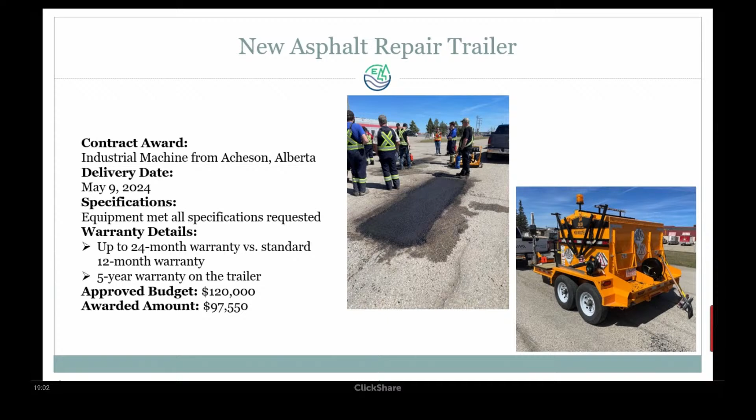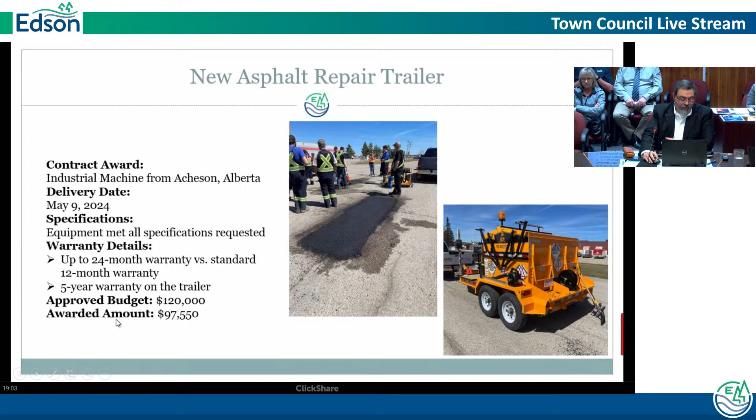All the equipment met the specification requested, and we upgraded the warranty to 24 months instead of 12 months for the equipment itself, and the trailer has a 5-year warranty. Approved budget for this item is $120,000, and the awarded amount is $97,550.

Fleet projects out for tender: we have unit V141 replacement, a 2013 Ford F-250 crew cab 3/4 ton 4x4 service truck. The tender was posted on April 29th, 2024, and closed May 16th. Up to the point I submitted this presentation, I did not get information regarding who the lowest bidder was or who we awarded to.

For unit E114 replacement, it's an ice resurfacer. The tender was also posted April 29th, 2024, with closing date May 16th.

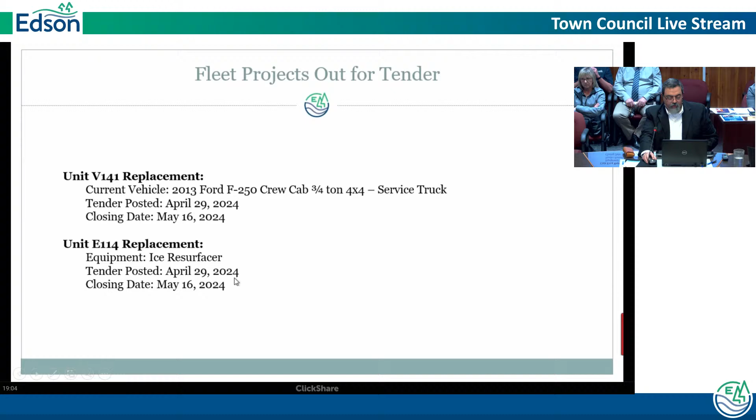For fleet and utilities upcoming 2024 projects, we have the fluoride plan, a regulatory contract signed with Advisian, our consultant, and work has started. Water treatment degas is also regulatory; it's in design and will start once the fluoride work is complete.

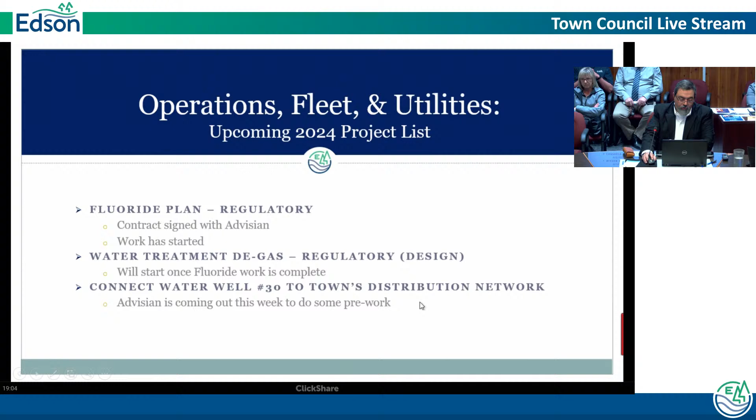Connecting water well number 30 to the town's distribution network. Advisian is coming out this week to do some pre-work.

For operations, transportation, and parks upcoming 2024 projects: Vision Park, and directional signage for Wilmore Park. These are coming projects.

Item MT Trackless 7 for parks: it's an articulating all-season tractor. This was a 2023 item carried over to 2024. The tender was issued May 4th, 2023, and closed May 25th, 2023. The 2023 budget carry forward is $210,000.

It was awarded to Joe Johnson Equipment. The award amount is $183,167.84. Delivery date is February 16, 2024, so it has been delivered.

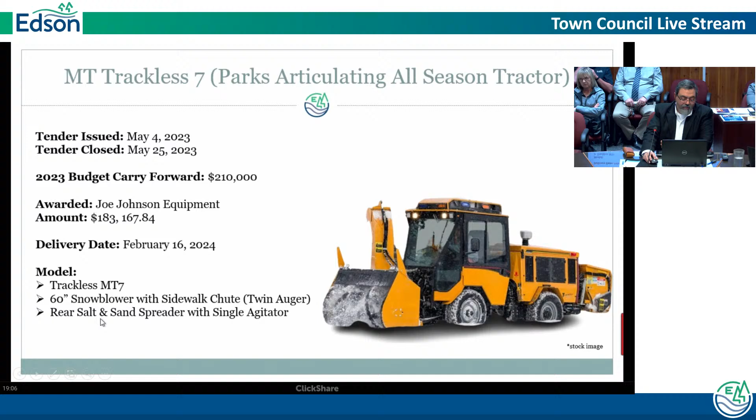The model is the Trackless MT7, with a 60-inch snow blower with sidewalk chute twin auger, and a rear salt and sand spreader with single agitator.

The new item: new plow blade for the airport. The budget was $35,000. Purchase price is $25,939.75. Acquisition date was March 1st, 2024, and the model is CAT 966G.

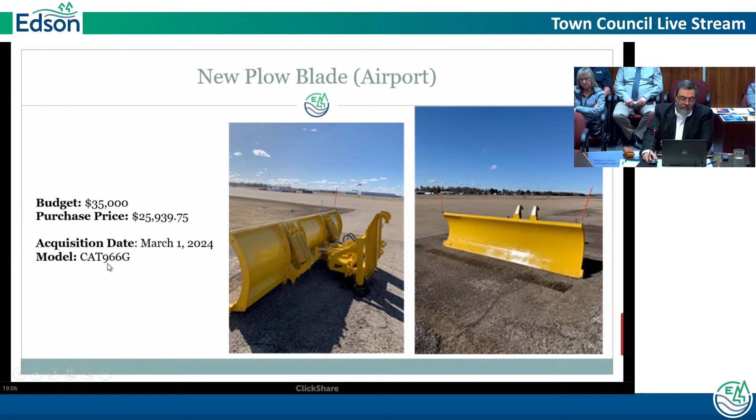Any questions before I move to the new section? Councillor Pisichny, go ahead.

I think I'll ask Mr. Briscoe or Mr. O'Sullivan. I can answer that. Come on up, Mr. Briscoe.

Through the mayor to Councillor Pisichny: yeah, we're also surprised too. To be honest with you, to be fair, we hand delivered the tender packages to our 3 local dealers and we put it out on APC. When we reviewed it, the Calgary dealership, I believe, has got the last 4 out of our vehicles that we put out. So I'm not sure what needs to change or what can change.

We do put it out, like I said, hand deliver our tender packages to our local fleet dealerships, and we do put it on APC, and it comes back delivered to our door. Typically, they'll drive it out to us for that price, freight on board to Edson.

Thank you, Mr. Briscoe. Any other questions? That's your turn, thank you so much. All right, you can continue on with your presentation. Sure.

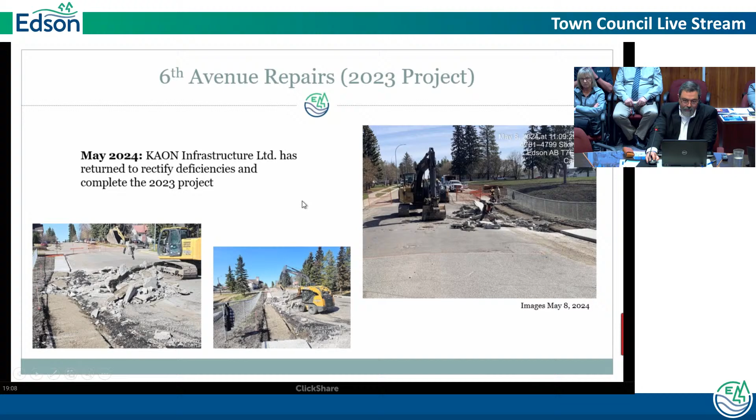Power line burial on 46th Street between 6th and 9th Avenue. We received the quote, and right now Fortis is in the design process. We received the quote on Friday, signed it, and sent it back to Fortis. The quote came for roughly $282,000. It's within our budget.

However, that doesn't include Shaw, TELUS, or any other utilities. This is just for Fortis, so we are expecting some extra cost to come later on. Right now they are working on the design, and they will be having an easement agreement with the school and the two apartment buildings down the road to make sure they can have their utilities on their land.

The construction phase is planned to take place during the summer months, July or August. I made this clear to them that we cannot start construction until the school is over, to ensure the safety of our residents.

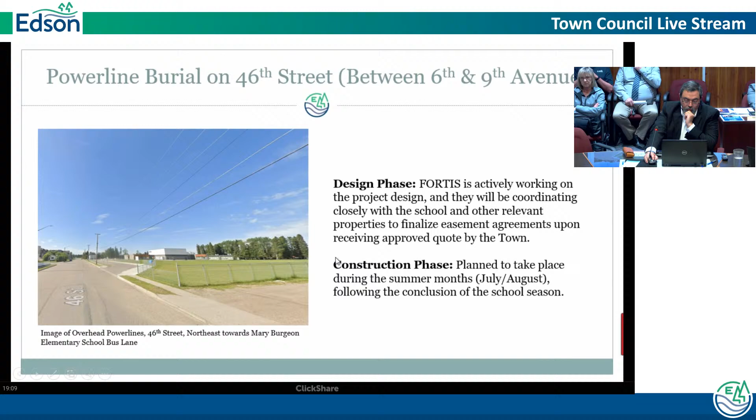I'll move to the next project, which is the construction of Township Road 532 between 54th Street and 63rd Street. We completed the tree clearing work in the 4th quarter of 2023, done by a local contractor, McLeod Valley Sand and Gravel. Survey work was also completed in quarter 4 of 2023 by McElhanney Ltd. Geotechnical investigation was completed in quarter 1 of 2024 by MR Engineering. We are currently preparing the tender for design work in 2024.

These two pictures show the auger for the geotechnical investigation. I need to be really transparent and convey what's happening, because I was on site. There is a significant section on the west side of the road where, when I asked for geotechnical investigation, I asked for a depth up to 3.5 meters. But when they were on site, they kept augering up to 6 meters, trying to find the bottom, and the whole depth was peat moss or muskeg.

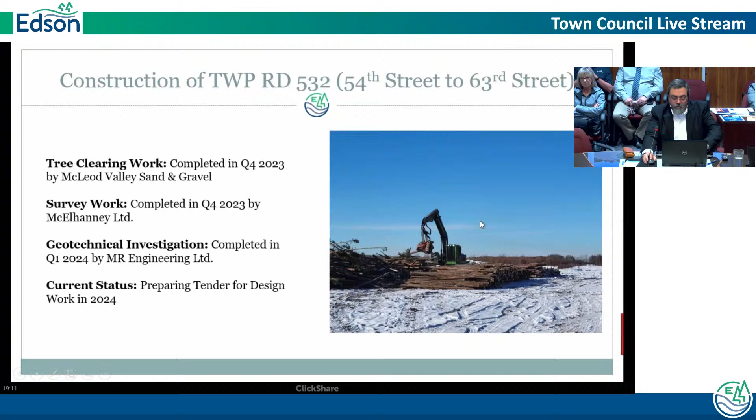It's all organic material, and just to clarify, this area has a high water table, and this organic material is compressible—extremely compressible. So I'm expecting the design engineer will take every precaution, mostly using a geogrid, maybe one or two layers. However, there is still a potential for settlement, so we might start working on this road and have to come back six months later, after the freeze and thaw cycle, to see if there's any settlement so we can backfill and repair.

This picture shows the auger reaching almost 6 meters, and yet they could not find a solid layer of soil.

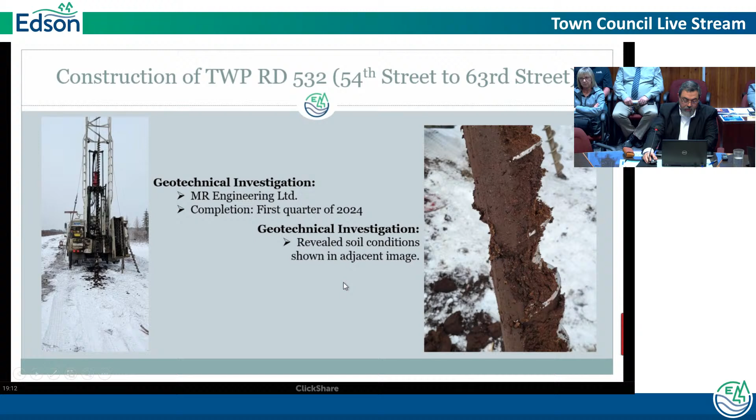18th Avenue Rehabilitation. The design and engineering consultant is WSP, a local consultant. The construction contractor is Parkway Enterprises Ltd.

Construction notices were circulated to the residents. We sent multiple notices to advise them on construction dates, detours, road closures, and temporary water connections. We're trying to keep residents up to date for every single action we take—we hand deliver notices, and publish them on our website and social media as well.

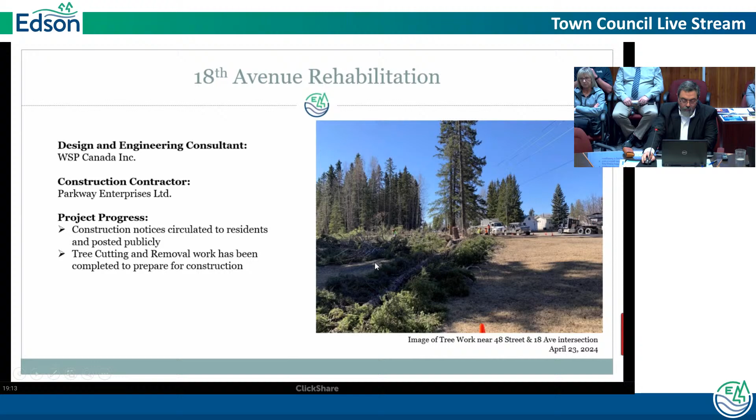We completed the tree cutting and removal work in preparation for excavation for the water line, and today was the first actual day of construction, so if somebody drove by they would see detour signs and the road closed. This picture shows the tree cutting from almost four weeks ago, and today is May 21st, so as I mentioned, construction has already started.

They have laid down a staging area at the east side of 48th, at the intersection of 48th and 18th, where they have all their equipment, material, and a trailer for a security guard to stay overnight.

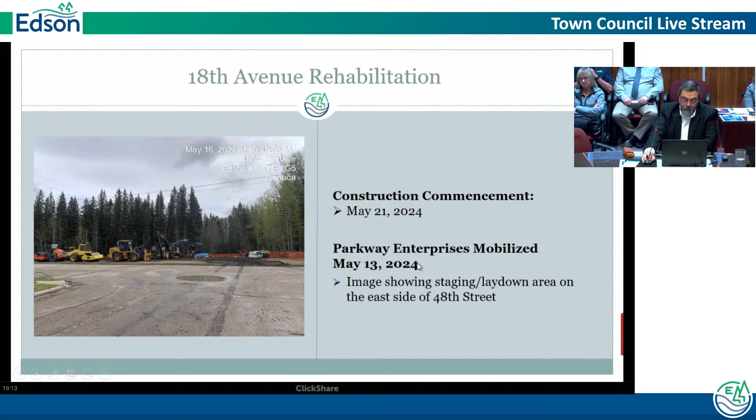These two pictures show the black pipe laying on the ground—this is the temporary water connection. We are connecting the houses to temporary water from the outside hose tap, and we will be turning their main valve off to ensure they have water during construction, because when we are constructing we are disconnecting the water main for replacement or for replacing services.

We took every precaution we can take. We have check valves on both sides to ensure water cannot return back in case there is negative pressure in the network, so no water can go back and cause contamination. I contacted the health and safety officer to ensure all our process is correct. We disinfected the line, and they should be connecting them on this line today or tomorrow.

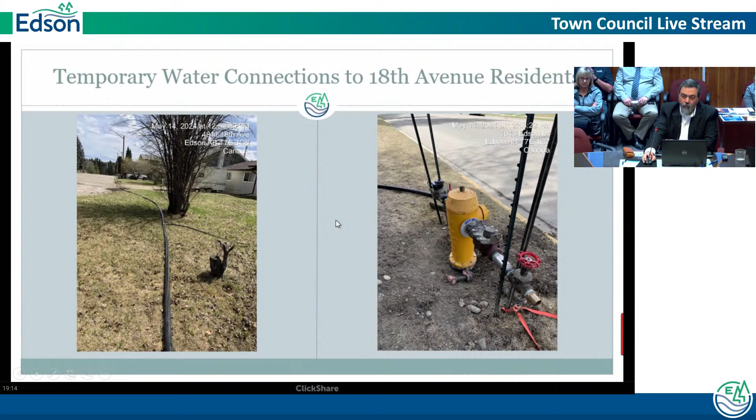I'll move on to 54th Street and 10th Avenue sanitary upgrade. Design and engineering consultant is McElhanney Ltd. Construction contractor is GS Holding Company, also known as GS Construction.

Construction timeline: construction commenced April 29, 2024 at the intersection of 54th Street and First Avenue. Anticipated work commencement on 10th Avenue is June 20th, weather pending, since we had to shut down for a few days due to rain. Anticipated project duration is approximately 90 working days, weather permitting.

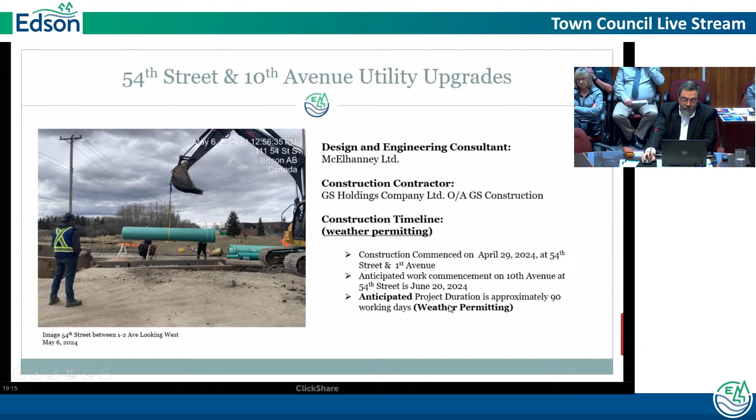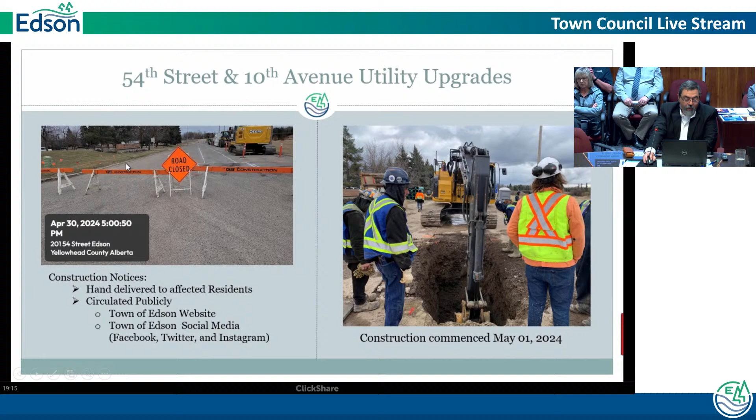Another couple of pictures showing the excavator cutting the ground for the trench for the sanitary line. And this is the road closure on April 30th when they arrived.

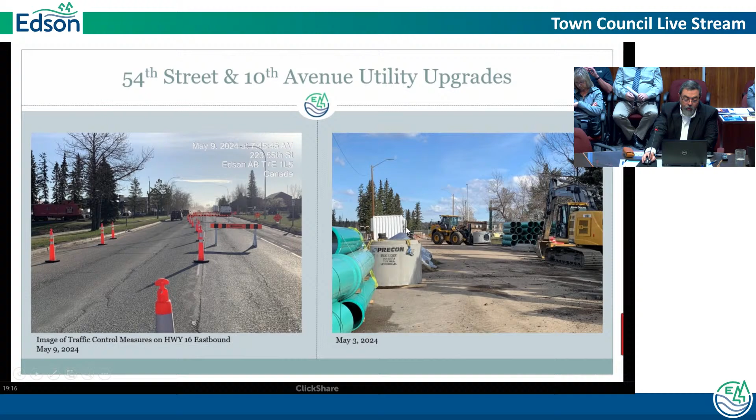As I mentioned, they had to shut down for a few days, so we maintained a wide one lane during the weekend. So far I haven't heard any complaints, and we hope by Friday the whole intersection will be open.

Upcoming projects for 2024: Wase Creek construction - shortly we will hear a presentation from ISL Engineering regarding their study, findings, and different options. Library parking lot and stormwater improvement design hasn't started yet. Anticipated 2023 flood repair in 2024 is ongoing with internal forces.

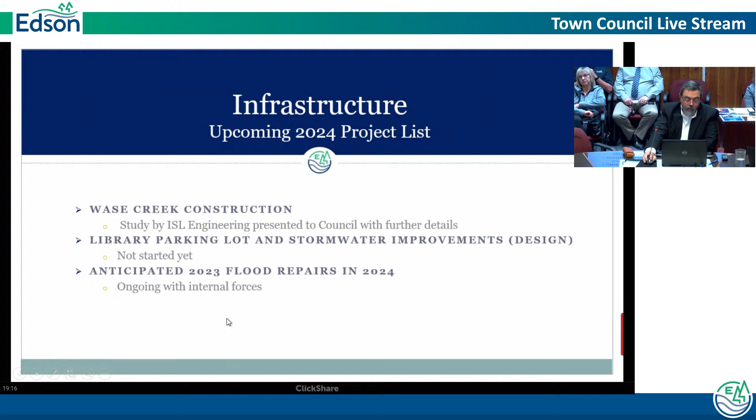Go ahead, Councillor Chouinard. Thank you for your presentation. I think somewhat over on 18th Avenue where we cut the trees down, I was asked why did we cut them. We're digging a water line in there - is that what was going on?

Through Mayor to Council Chouinard, yes, you're correct. There is a water line on the boulevard, that's where the PRV is, and there is a power line above the water line as well. So we had to clear the area to make sure there is enough room for the excavator to work without hitting the power lines. You're welcome.

Go ahead, Councillor Taylor. Through the mayor, thank you again for your presentation, and first off, thank you for getting the tenders out so early so we could start construction early May and not like September. This is great to see this construction happening and hopefully completed soon.

Just a question regarding 18th Avenue with setting up the temporary water lines to the houses. Are we expecting them to have any water pressure issues within the homes or anything like that?

Thank you for the question and thank you for the compliment. Through Mayor to Council Taylor, no, there should not be any water pressure issues unless there is a fire and there is a demand for water. That's the only case we can draw water and it can impact the pressure. But so far there shouldn't, because it's a 2-inch line providing enough pressure. You're welcome.

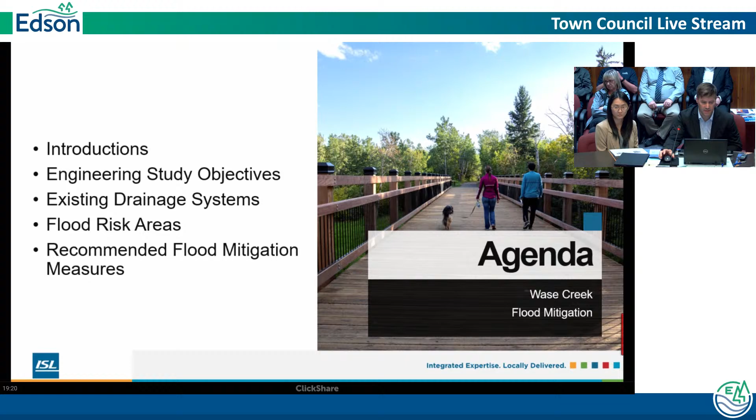Okay, thank you, Ermia, and good evening, Mayor and Council. So as mentioned, we're looking into Wase Creek specifically - the drainage, flooding, mitigation, and management of the flows through the Wase Creek area. Through this presentation, we'll look at the engineering study objectives, existing drainage systems, flood risk areas, and recommended flood mitigation measures.

For this project, we worked directly with Ermia McHale and Ryan O'Sullivan with the Town of Edson. I'm Jordan Hoffert, project manager for this project. We also have Sophia Liu here, who did a lot of the modeling work for the stormwater model. And we had a senior advisor, Russell Barth, who has many years of experience with stormwater management and water resource engineering. He was unable to be here today, but we do have a good understanding ourselves.

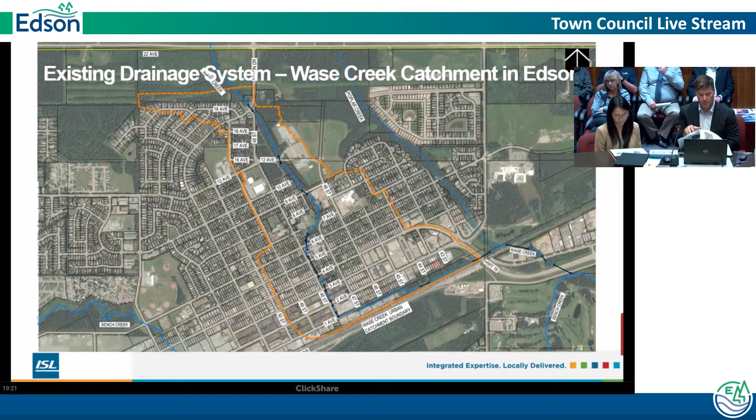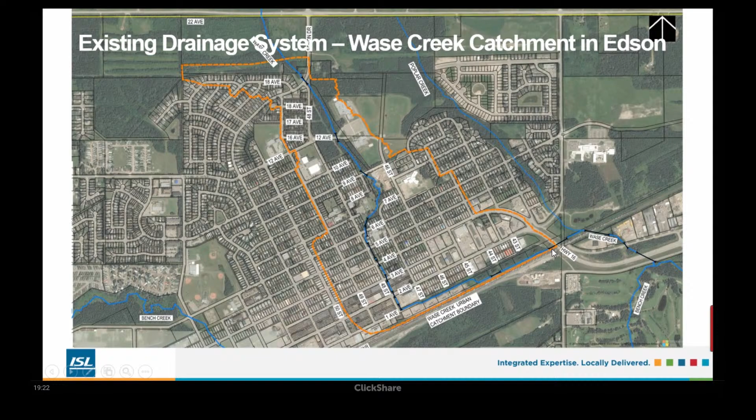Okay, so the existing drainage system - just a bit of background, and I'm sure you're very familiar with Wase Creek, but it is one of 3 creeks that runs right through the town of Edson. What we're seeing here is the urban catchment highlighted in orange. So basically anything within this boundary contributes to the flows of Wase Creek. Of note is the outlet, at the southeast corner by Highway 16 and the CN rail that's basically parallel to the avenues there. There are lots that border the CN rail where this creek is currently located, which is of significant note for this project.

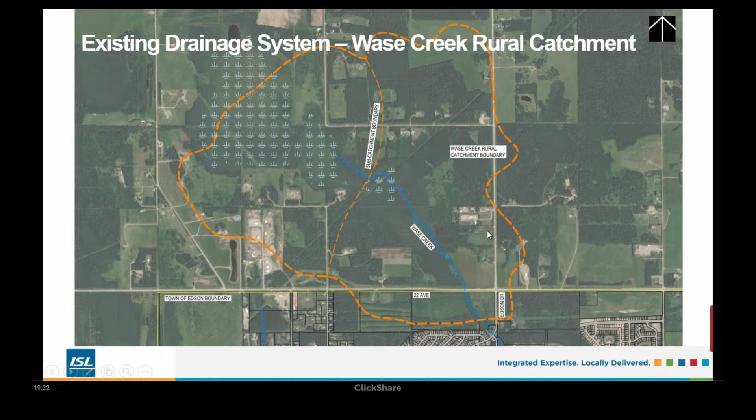To the north of town, there is an additional catchment that does contribute to the Wase Creek drainage. This area is fairly large, but has a slower runoff contributing to the Wase Creek basin. But these flows do flow through town as well.

What we want to do with the study is understand the stormwater flow for the creek and all the contributing areas, both urban and rural, as well as any pipe flow that discharges into the creek. From that, we want to use a computer simulation for modeling those flows, specifically so we can quantify and identify any areas that might be at risk. And then we can also use that tool to propose different flood mitigation measures that may be needed.

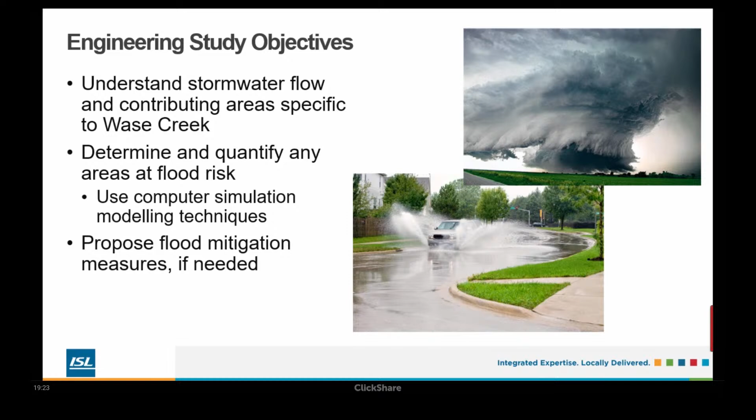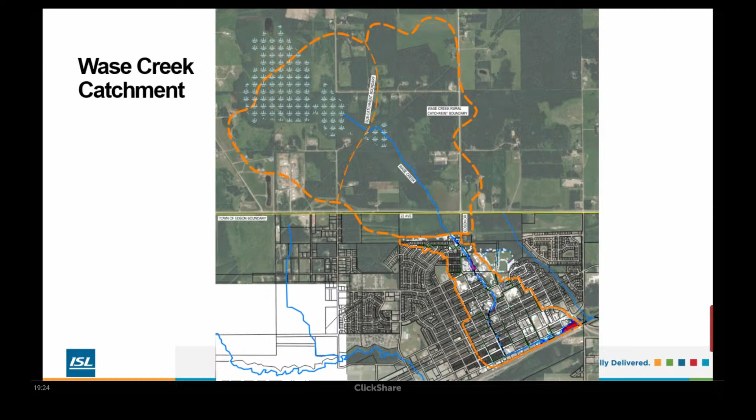As mentioned, there are the 2 catchments, the urban through town and the rural to the north. This gives a good representation of size, of how much water or area would be contributing. Of note is how the 2 catchments work independently. When rainfall happens in the urban area, runoff is very quick due to high imperviousness through town on asphalt or pavement areas. Through the storm pipes, it's collected and efficiently conveyed to Wase Creek, so stormwater that lands within that catchment gets to the creek quite quickly.

Conversely, the north catchment is actually quite slow. There's a high level of perviousness. It is usually at a lower grade with a lot of vegetation that allows for infiltration into the soils, and runoff from this area typically wouldn't peak until much later than the urban, which was confirmed through the modeling.

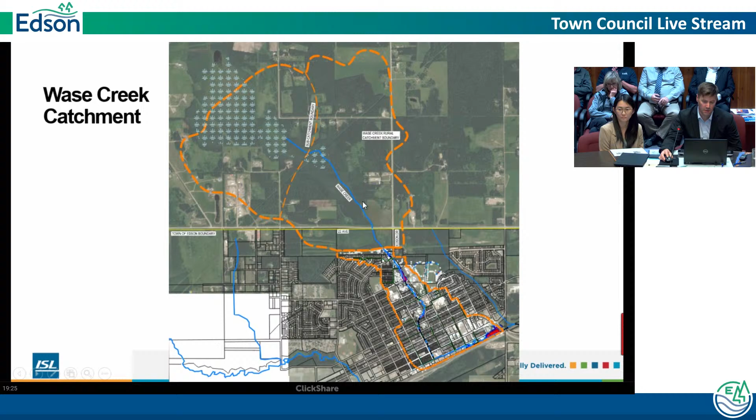So I'll just pass it over to Sophia. She'll run through what the model consisted of and what some of the components of that were.

So to assess the Wase Creek drainage system, we developed an integrated 1D, 2D model, and this model consists of a 1D component and a 2D component. The 1D component is basically your underground drainage system, so it consists of the storm pipes, manholes, culverts, and catch basins. The 2D component is basically the ground surface of your catchment area, so it includes the roadways, the ditches, and also Wase Creek.

So how the 2 models integrate together is when water falls onto the surface, or the 2D component of the model, some of it can enter the underground drainage system through the catch basins and then flow through storm pipes, eventually all falling into Wase Creek. And then some of the water will not make it into the catch basins - it'll flow overland on the surface and eventually into Wase Creek.

So with this integrated 1D, 2D model, it allows us to evaluate both the underground drainage system as well as how water flows on the surface, to identify potential areas with flood risk and evaluate the performance of Wase Creek.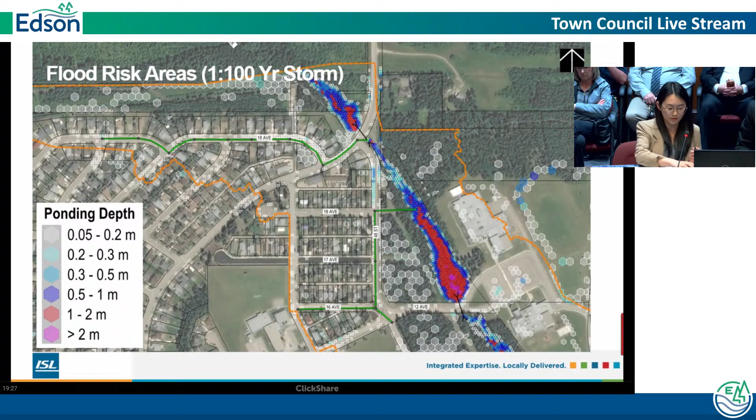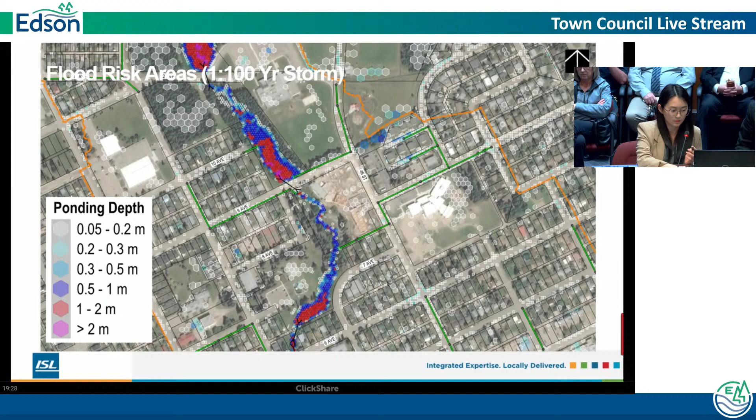Running through other areas along the creek, water is again contained within the creek with minimal ponding on the roadways. Same here as well, we're containing the water within the creek. So we've been seeing positive things about the creek up to this point.

Once the creek reaches First Avenue, we also identified additional ponding on First Avenue just west of 48th Street, again up to about half a meter. So this is another area where some surface upgrades would improve or reduce the depth of ponding.

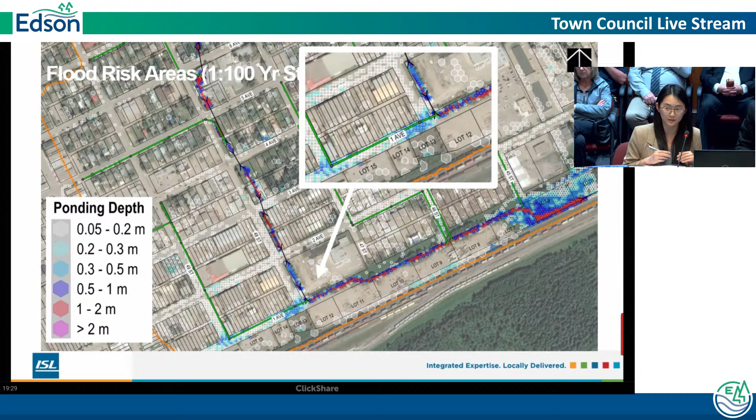Starting here, Wase Creek turns east and flows along a portion of the existing right-of-way, and also starts to route through private properties along the CN rail. Further downstream, on the right side of the page, the creek does not have enough capacity to contain all the water, and there is some water spilling out onto adjacent properties.

Towards the downstream end, we're seeing worse ponding. There's a culvert on lot 5 that's restricting flow, so there is water spilling out onto private properties. Wase Creek then discharges through a 900 millimeter culvert that crosses Highway 16, and this culvert is undersized, restricting flow as well, causing more ponding on the adjacent properties.

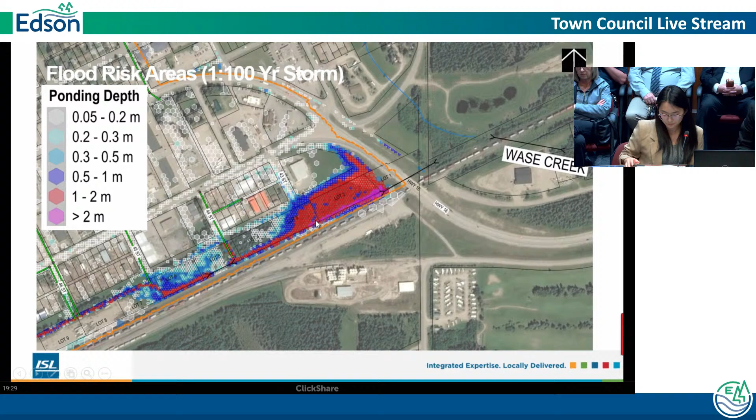With that, there's one more slide to summarize what we've observed from the model results. Generally in the upstream portion of the creek, there is enough capacity and flow is contained within the creek. However, it's a natural creek, so fallen trees or debris could overload the system and cause flooding risk, so it's important to maintain the creek and culverts.

We identified some minor flooding risk on the roadway at two locations, one on 48th Street near the north end of the system, and the other on First Avenue west of 48th Street. We also saw significant flood risk on many properties next to the CN rail, where the creek does not have enough capacity to contain the water, causing flooding onto adjacent properties.

We also want to highlight some issues regarding the properties adjacent to the CN rail. The creek channel routes through those private properties, and there is no access by the town staff to maintain or inspect the creek. There is an undersized culvert as well as an undersized outlet restricting flow, causing further flood risk to the properties.

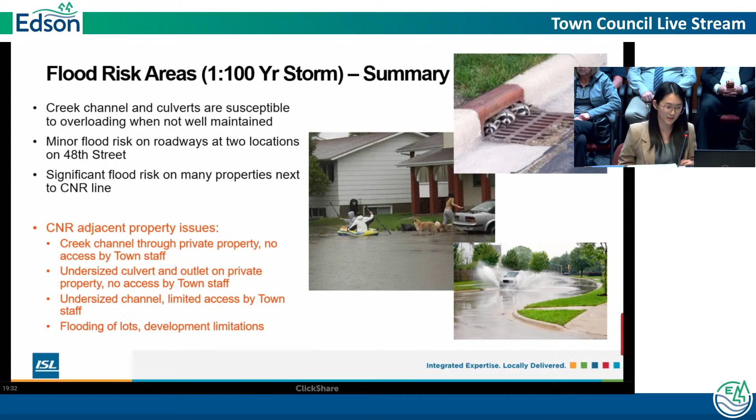Okay, so some recommended mitigation measures. With Wase Creek being a natural creek for the most part through town, there are some ditch sections that are easily maintained, but for the mature growth of forest in those creek areas, buildup of fallen trees or large deposits of sediment after large rain events can impede future flows and impact flooding significantly.

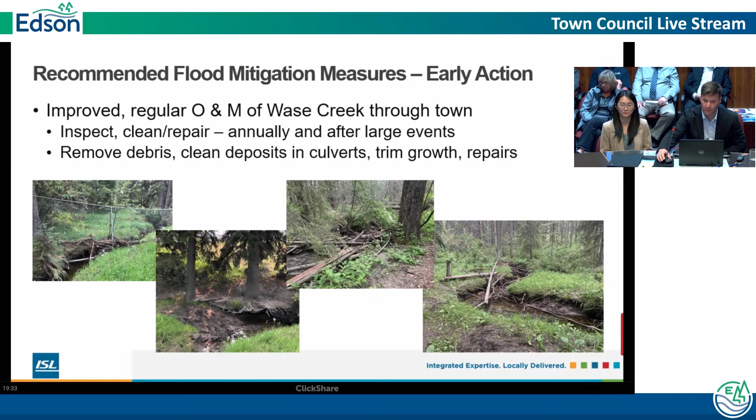One thing to note with our model is that we have to assume a certain limitation to the obstructions, assuming it's primarily free flowing along the alignment of the creek. So maintenance of the creek is recommended on an annual basis to inspect and remove any large obstructions that might limit flow through the creek within the town area. Those are ongoing things that could help manage the creek.

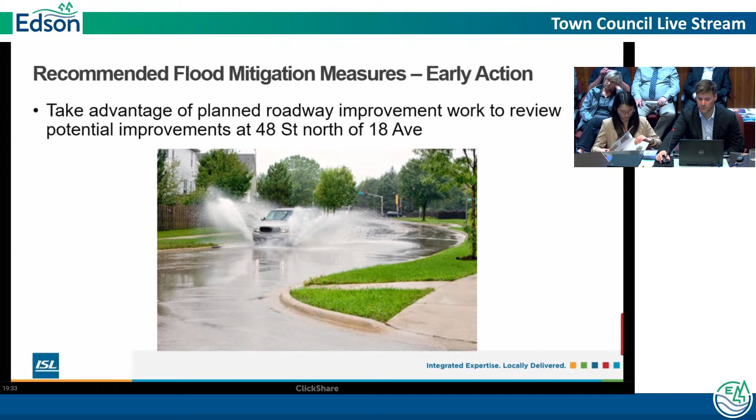As noted, there were a couple of roadway areas with potential ponding as well. With those two areas, there could be opportunistic opportunities to incorporate improvements within any roadway upgrades that may be planned in the future. Or, specific to this, you could take a more detailed approach to quantify those impacts and see if there are straightforward solutions that could be done.

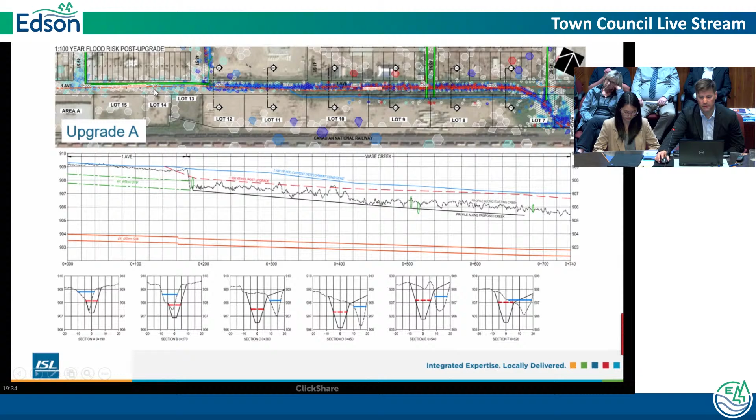So focusing on the south end, I think this is obviously the more important area where there was flooding. So what we've done is we've looked at flooding through the area here, understanding that with a creek that's on private property, there's limited maintenance, and that in itself is a significant risk for flooding. If there were any alterations or changes to the creek, or someone drops in a culvert without anyone knowing, it can have some fairly significant impacts.

So for the town to be able to manage that, we looked at solutions that would allow the town to have full access while limiting impact to the lots specifically. So with this upgrade A, and it'll carry into an upgrade B, it's essentially a staged upgrade where we try to realign that creek into an engineered channel through the First Avenue right-of-way.

In doing so, it provides full access by town staff to do any maintenance. It's much more manageable that way. And by diverting it off the private lots here, we're able to actually widen the cross-section of it, giving it larger capacity so that it can convey more flows and even provide some storage component to it.

So that's what's shown here, where upgrade A takes this very close adjacent creek and diverts it into the road right-of-way right beside it. When the creek heads further, or closer to the CN railway, that's where we basically stop upgrade A. But the upgrades within this stage itself, you can see the two lines that are shown.

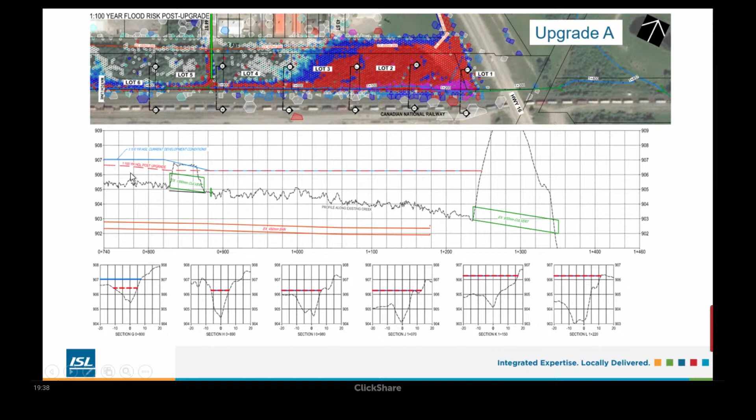So there's a couple different scenarios that we could discuss about how that would work. But for now, the upgrade is, like I said at the start, trying to maximize the benefits and improve the drainage while minimizing impact to the lots. So in the previous slide, we're improving the ability to actually use lots 7 through 12. And then in upgrade A, this is just a summary of that.

The key point here, I guess, is the estimated cost of 1.3 million. This is really just the improvement of the ditch cross-section and locating that within the First Avenue right-of-way, and then some of the minor improvements at First Avenue and 48th Street. So that would be the estimated cost for that improvement for upgrade A.

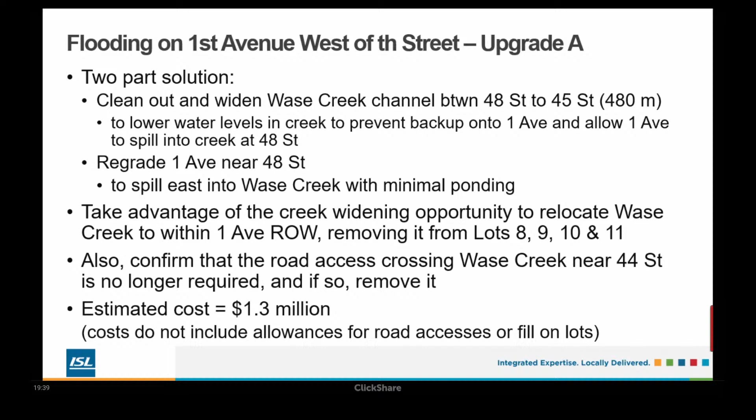When we talk about Upgrade B, the improvements from Upgrade A have already been completed. So we have the channel running through the First Avenue right-of-way, but then at the deviation of the creek alignment, we extend that channel through the First Avenue right-of-way.

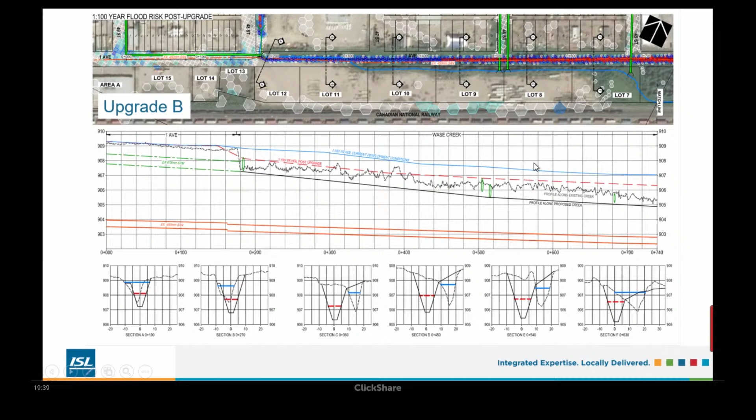You can see the adjacent lots here essentially not impacted because of the construction of this Upgrade B component. Of note, though, is that there still is required to have a storage component to allow for this to function, but this is still with the 900 millimeter culvert that crosses this. So with maintaining the outlet at that size and the addition of storage on lots 2 and 3, it would allow for elimination, as the model shows, from lots 4 through 12. So again, this is limiting impact to lots and maximizing drainage management opportunities.

Basically it exemplifies that we could upgrade the outlet culvert. However, based on the use of the land that we have here, we don't necessarily need to, because there is a storage component to this already, since this area is quite low-lying.

So we did look at other options of maybe not using lots 2 and 3, but upstream lots 4, 5, and further upstream. But none of them had the efficiency of using lots 2 and 3, because they were already naturally low-lying. The benefit was too great, and we saw this as the most viable option for this upgrade.

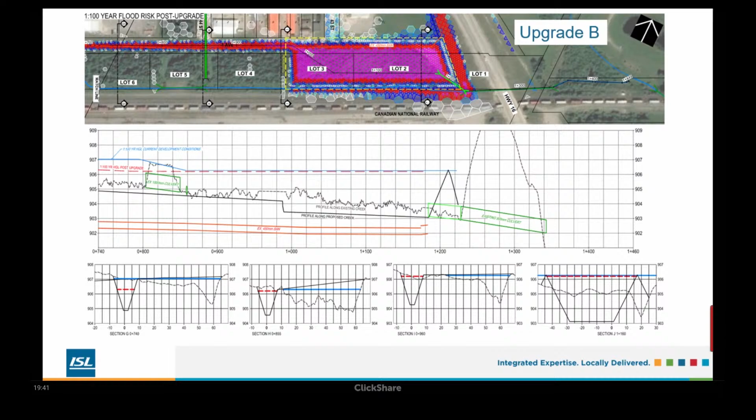So essentially it's a two-part solution. Upgrade B cost would be 2.4 million, in conjunction with the 1.3 from Upgrade A, so that would be 3.7 total. That would be the upgrade for increasing the conveyance through the channel in the First Avenue right-of-way, and then controlling with the stormwater management facility on lots 2 and 3. So this is the approach that we took for this.

There are other options that would be tied into lot ownership or acquisition or establishment of easements that could be done as well, which could potentially reduce those costs and really change the scope of what would be required for that.

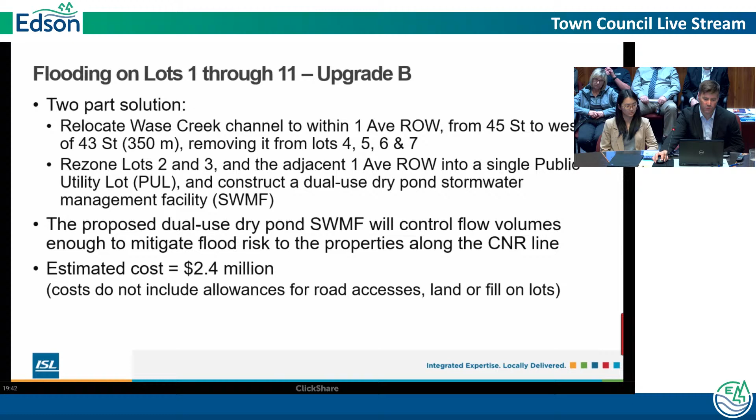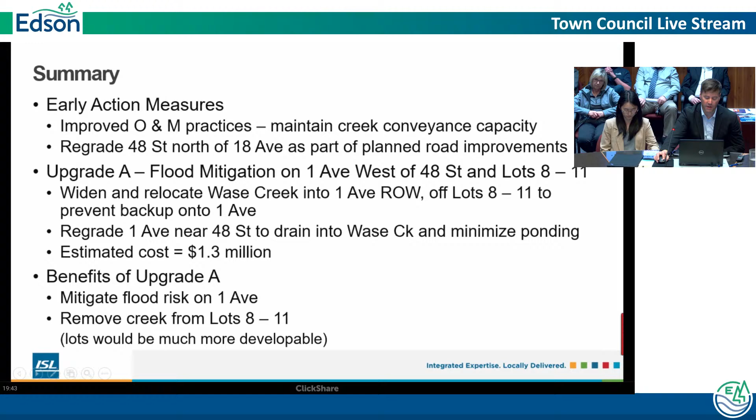So to summarize, early action measures are maintenance and removal of debris to maintain conveyance capacity through the existing creek. Upgrade A looks at improvements right on First Avenue and 48th Street, and then widens the creek within the First Avenue right-of-way, from lots 8 to 11, for an estimated cost of 1.3 million. The benefits are that it mitigates flood risk on First Avenue that currently exists, and would provide for development on lots 8 through 11.

Upgrade B continues with the use of First Avenue right-of-way, and includes a need for a stormwater management facility on lots 2 and 3, for an estimated cost of 2.4 million, with the benefits being a fully controlled system for the 1 in 100-year design event with no flooding on any private properties, currently seeing that. It also maintains any downstream impacts that might exist.

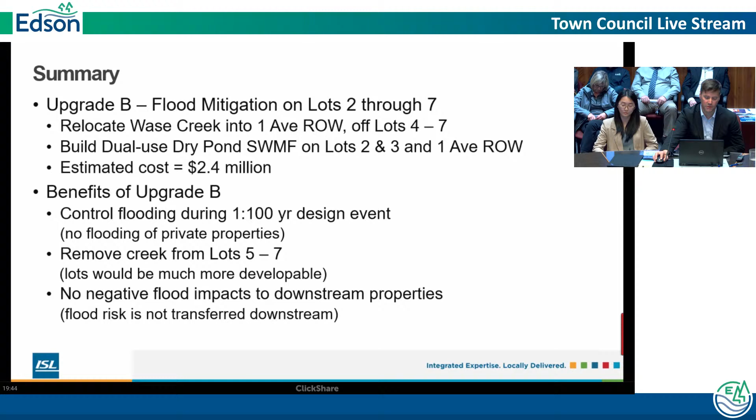The one thing to note about increasing the culvert size of the outlet is that the downstream impacts would not be fully recognized through simply a Wase Creek study, and would have to expand to include Poplar Creek as well, and the effects on any adjacent properties downstream. Any questions?

Thank you very much for your presentation, Council. Move on to Councillor Chachka. Go ahead. Thank you, through the mayor, to our presenters, Mr. Hoffert and Ms. Liu. Thank you for the in-depth information in the package that showed all the alternatives about why you maybe wouldn't go this way or that way.

That's really appreciated. My question is regarding the creek channel through private property and no access by town staff. I'm not sure if you can answer this. Is someone allowed to just put in a culvert into a creek without special permissions from Fisheries and Oceans? I thought there were easements for government access to creeks within the easement of the creeks. Can you go into a little more depth? I'm not sure if you know why we wouldn't be able to access something like that.

Yeah, real good question. The creeks that are defined through Alberta Environment would be covered under the Water Act. So any alterations, changes, or work within that waterway itself needs to abide by Water Act requirements, which would have to be done through an application process. The challenge is that Alberta Environment doesn't necessarily have the means to inspect and check every creek all the time, and over the course of time, things happen that may or may not get recorded or reported. So that would be the risk here. I think the access to that creek, being an actual named creek, does allow for maintenance or access to it, but within the confines of the defined creek channel itself.